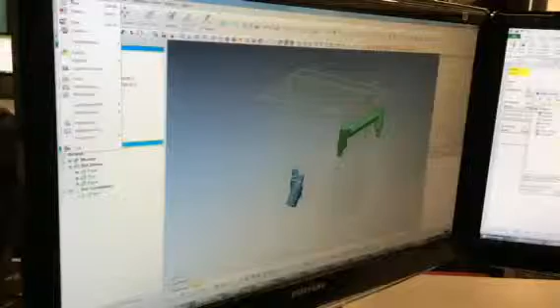Actually, I guess it's not under File. It's this File Import button right there.

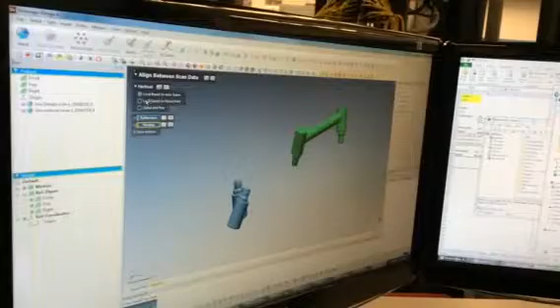And then the next step would be to align these. So Tools, Scan Tools, align between scan data. And you have three options. When they're this far apart to begin with, you'll do local based on picked point. And you have to specify which is your reference and which is your moving.

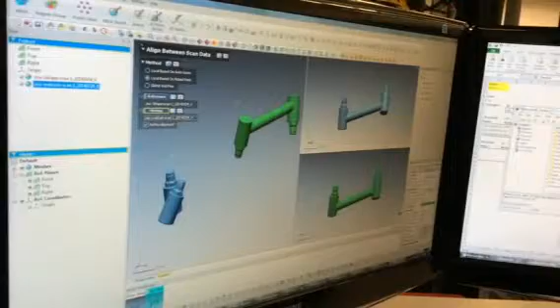And really that doesn't matter in your case. You will want to make sure that these are aligned roughly oriented, so you're grabbing the right ends. And then you're clicking a point on one, and then you click a corresponding point on the other one.

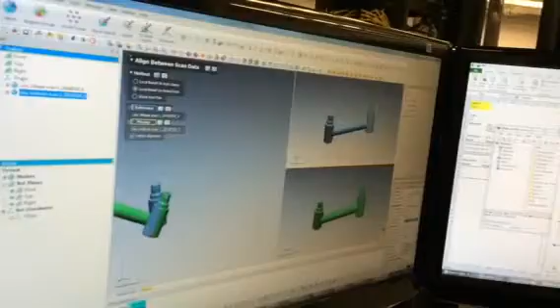They don't have to be perfect. I can do it very rough to begin with because we'll refine it later. You just need 3 distinct pairs. And it won't work really good if all 3 of them are in a line, so make sure one of them is kind of offset.

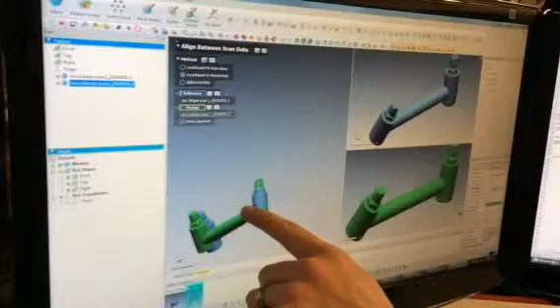I could be picking somewhere over here, but we want to align primarily to this, so that's why I'm doing that. And as you're doing that, this will be updating and showing you kind of a best fit where it's at.

Then you click this, right click, apply, and it will refine based on what's there, and then it gives you an overview of how close the alignment was. And you can click OK.

And so now we can see, it's decent to begin with. So then we'll do that again. Tools, Scan Tools, align between scan data.

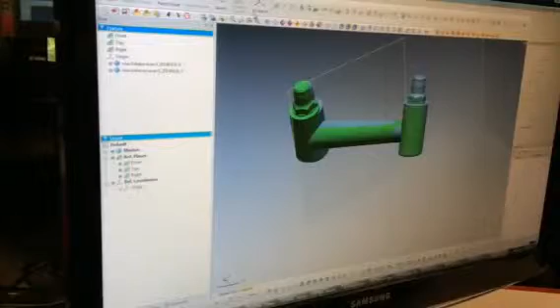And this time we'll do global fine. This is the one that allows us to pick what we really want. And again, you'll pick a reference and a moving one. And the only difference is the reference stays still, the moving one moves toward it.

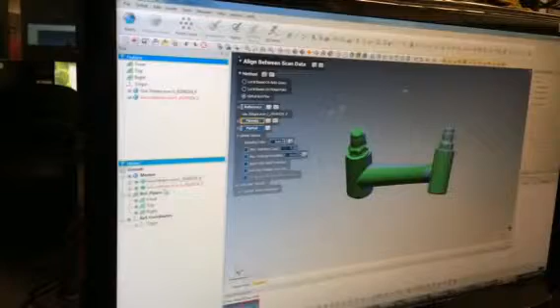And even that, you can change - there's an option where if you want them both to move, you can have them both move. And then this partial is where you pick what you want, which parts of the data, and you have different tools for selecting.

You can use a paintbrush and paint the area. If you want to be real precise, the paintbrush is probably the way to go. If you want to begin with, you can use this kind of rectangle selection tool and just pick a whole bunch, and it picks data from both scans at the same time.

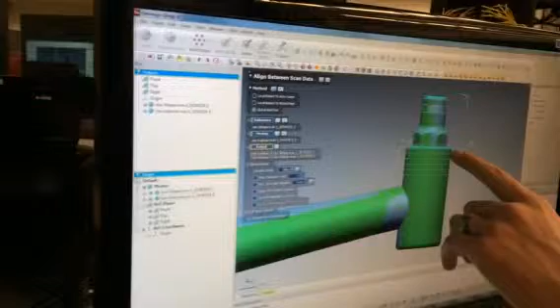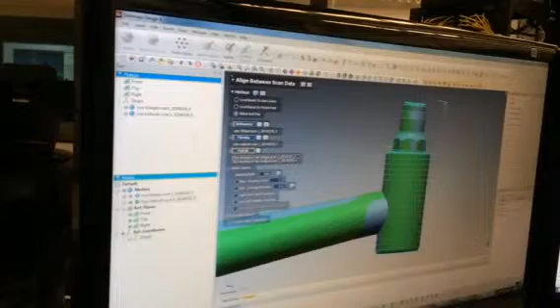So you're seeing here polyvertices of the one, polyvertices of the other. And if you need to, you can turn one off, turn the other on. And so it'll keep adding to it as you go. If you accidentally pick some that you don't like, if you hit down Control and then do it,

it'll take them back off. So control is for removing it, in this particular mode, because this is defaulting to an addition, or adding them on mode. And what you can see is that with this rectangular one, it's getting both the ones on this side and the ones on the back side.

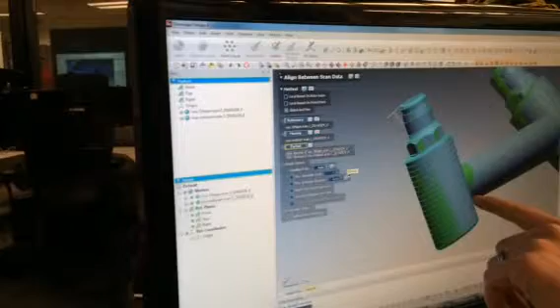If you want to be more precise, you go to paintbrush mode. And then it just grabs the surface. Now, I've already grabbed most of these, so it's not adding new. But like, so for instance here, I can add some new ones.

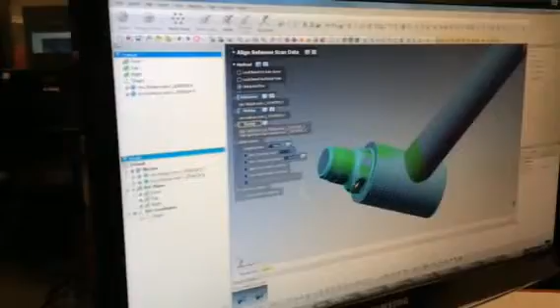And get it as close as you can, get as much as you want. And it's a CAD file. Even if it superimposes a little bit, it'll still superimpose everything. And so then in here you have a lot of options you can work with.

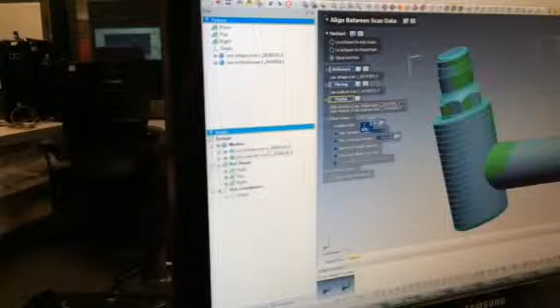The sampling ratio is how much data it's using. I don't normally do partial, so I'm not positive. Normally I set this to 100 because I want it to sample all the data. I'm assuming this means 100% of the things you've selected. Sure, that would make the most sense to me. Right. You may want to try it with and without and see if you notice a difference. But so you put it to 100.

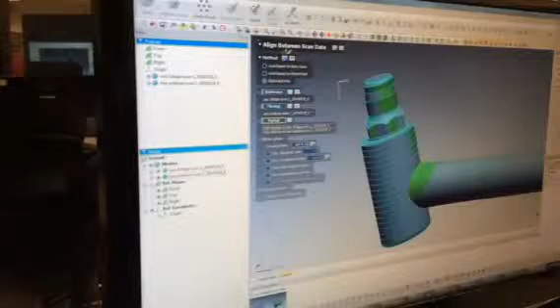The rest of these, you don't need. I would just leave them all unchecked. It shouldn't affect your data. And then hit this triangle up here, and it should wiggle around and should align. And again, if you click on here, it shows just how awesome this alignment is. The histogram is basically a vertical line, so it aligned very closely.

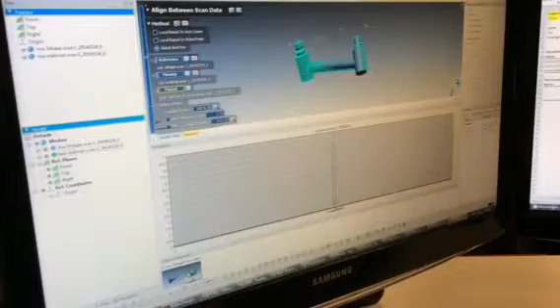Yes, and I'm guessing that it's showing mainly the partial data that we picked. That's why it's so perfect, because it isn't perfect all over. It's perfect in that one spot. And then here, we can close that and get rid of that, and then hit the triangle, and that'll keep that data. All right, and so now you can see just how perfect it's aligned.

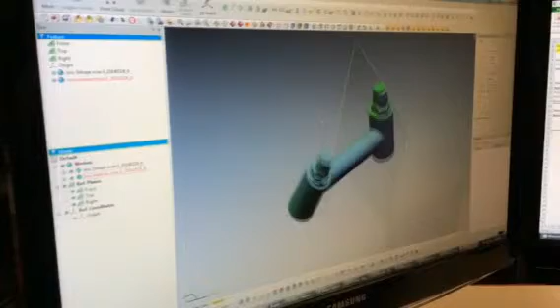If you wanted to do mesh deviation, you could at this point. Under measure, there's mesh deviation. And again, you're picking a target, you're picking a reference. It's kind of the same interface. I also wanted to ask about tolerances. How do you change that? How do you modify that? And then it gives you the data accordingly, right?

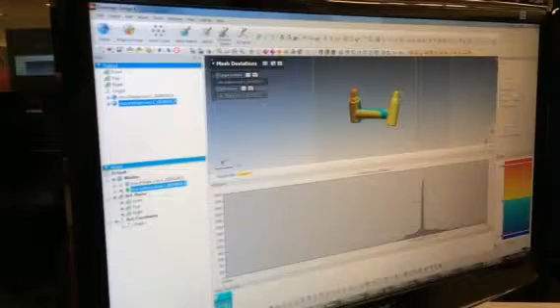Correct. So here you can see what it does, and these are all things you can turn off and stuff like that. So this may end up being useful for you. This is kind of a simplified version of the other one, and again gives you a histogram. That's good. But I want the histogram only of this part. So how do I do that?

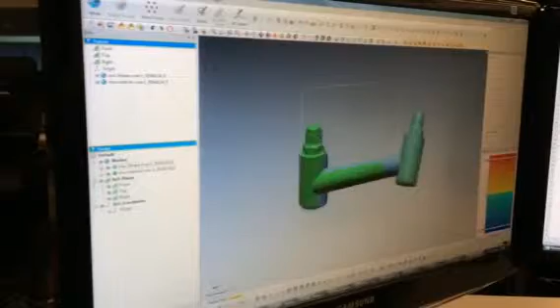I don't know if there's a nice way to do that in here. Well, there is a way to do that. Let me show you. Cut off this part? Yes, that's what we would end up doing, basically cutting out what you don't want. And so what you can do with any of these, it's just like Word. You can do Control C, it'll make a copy. You can do Control V, makes a copy of it.

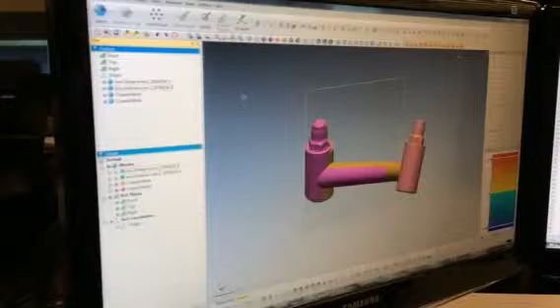So with this one, Control C. It always prompts you. And Control V. And so now we have copies of the same one. If you double click on it, it allows you to edit it. I can say, okay, suppose I don't want all of this. Hit delete. And whoops, there were some other faces below it.

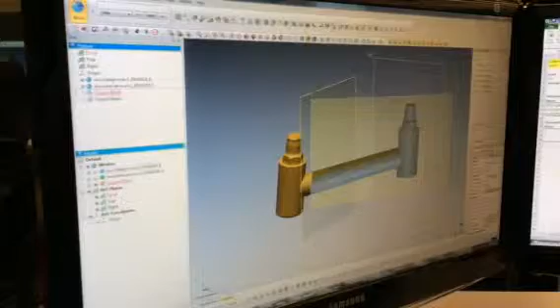What I could use is this, it defaults to select visible only, is what they call that. So I can go like this, hit delete. Awesome. Okay, so now that's there. And then if I want, I could go into this one and do the exact same thing, delete. Ideally, that can give me good data too. Yes. So now you could get deviation.

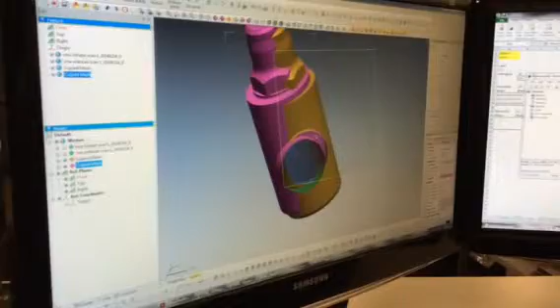The one thing that's a little bit funky, depending on how far apart these are, you might get some weird data. Well, and again, the bar is CAD designed, but it's hand CAD designed, so it's not the same connection. Okay, and I could have been a lot more careful about this. You can go in and do the same thing with precise selection, cut it, go like this.

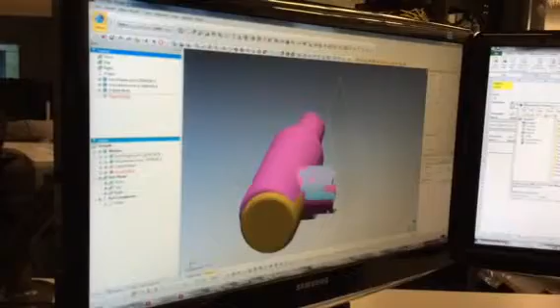Because this came from a CAD file, it's such nice geometry. Everything is very easy, and these shapes are nice. So if you wanted to do deviation, you could then do that. You could go measure, mesh deviation, pick your two. If you need to change units and that sort of stuff, that's all under here, preferences. Okay.

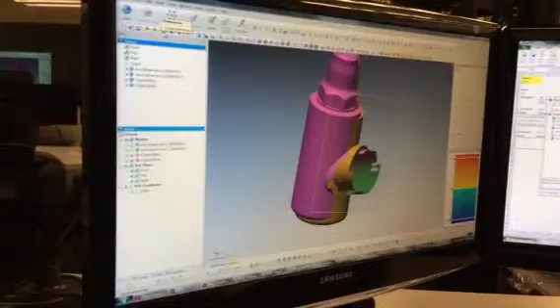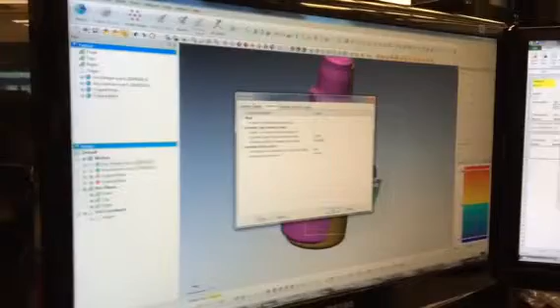And it will pop up on your screen. And under General, you can go from millimeters to whatever you want. Millimeters is probably as small as it goes. It'll give you fractions or decimals of a millimeter. And then you can go in here and mess with tolerances, which I would have to do. Yeah, I don't usually do a whole lot in here.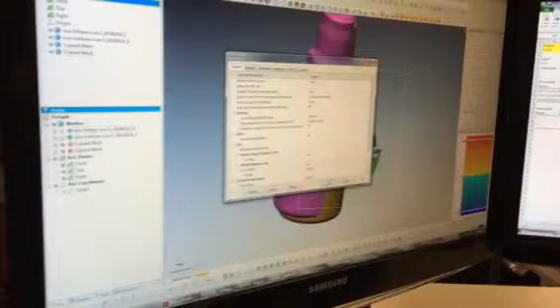And it looks like this is more tolerances for how it does. It's looking for outliers, its alignment, that sort of thing. So I'm not positive. You might have to read up on that because I don't do a whole lot with the tolerances. The rest of the stuff you shouldn't have to mess with. But at least to get to millimeters, if it's not that already. No, it is there. Oh, and you can change the default decimal places. So for you, four might not be enough. Yeah, it will be enough. I don't want more numbers than you can deal with.

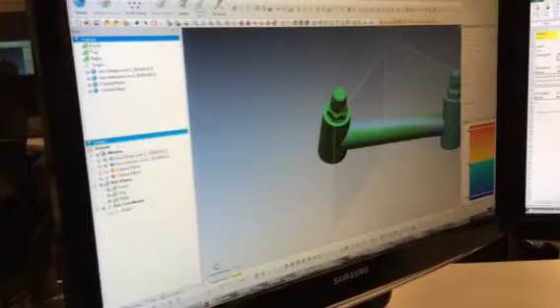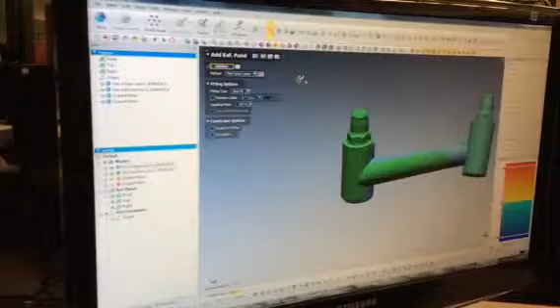So let me go back to these two now. And so I'm going to turn off the reference planes. So now if you want to make what we would call datum points or reference points, you go to reference point at the top, and you can choose. There's a whole bunch of different ones. They're pretty self-explanatory. And on any one of these, if you click on it and hit F1, it'll open up a help on how to do what you're trying to do, and will tell you exactly what they are. So, for instance, circle center creates a center point from selected entities, and you can choose.

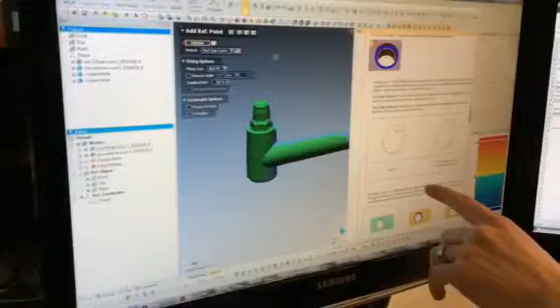Now your data is going to be so nice that most of this won't matter. But if it was noisy, you could do best fit, get rid of outliers, that kind of stuff. So anytime, whatever you're working on, if you hit F1, it'll bring up a context help. Okay. That will help.

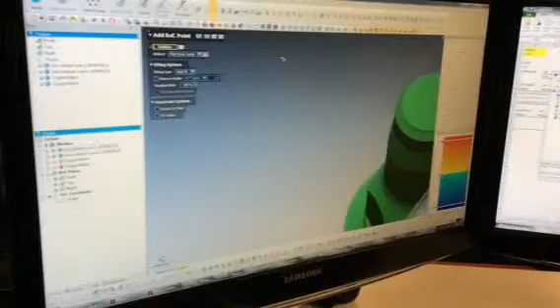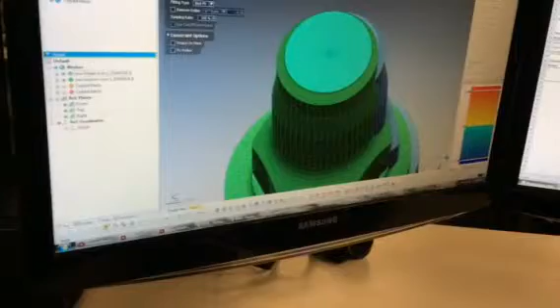So now, if we want to find circle center, because again this is CAD, it's easy enough where I'm in the paintbrush mode, and it's just as simple as select all of them. Paintbrush mode is that one right there. And if it's helpful, you can switch to different shading modes if it's easier to see the edges. And then after you've selected all these, it'll show up that there's polyfaces in here. Make sure that you are only selecting stuff on your one model. What you see is what you get. Then you hit the check, and boom, you have a point.

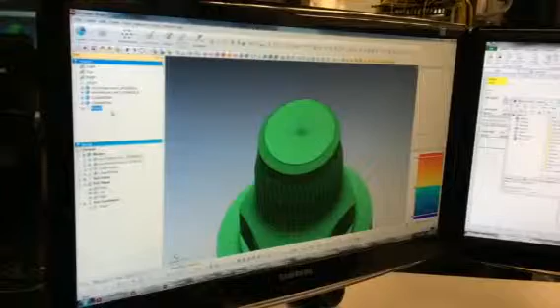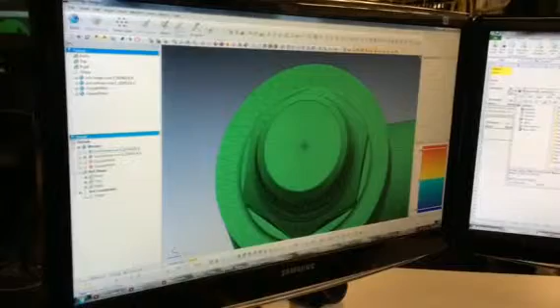At any time, you could click this and go in and label it. So click it, then click it again, and call it datum center, whatever you want. And actually, it looks a little bit off from what I would have expected. It does look a little bit off. Let me delete it and see. I may not have selected all the points we would have needed. Find circle center. Make sure it didn't get anything we don't need.

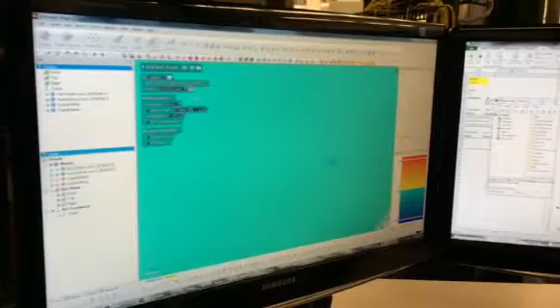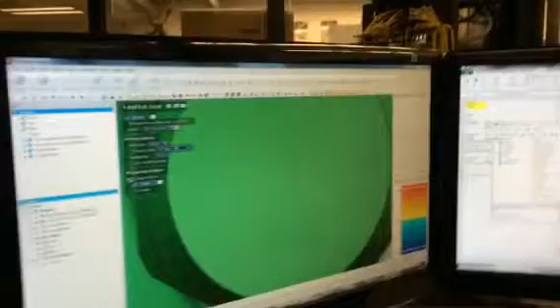Fitting type, best fit, minimum bound. So let's see. Still off by a little bit. Why would that be? Why is that pink dot there? There are like two. Yeah, that's a good question. I don't know why the pink dot's there. Okay, there are different constraint options here. And this is a preview button, so we can see. We are getting two dots. Oh, sorry, the dots are showing vertices. You have a whole bunch of triangles here, so those are vertices of the triangles. Okay, so why is it off? You have it on best fit.